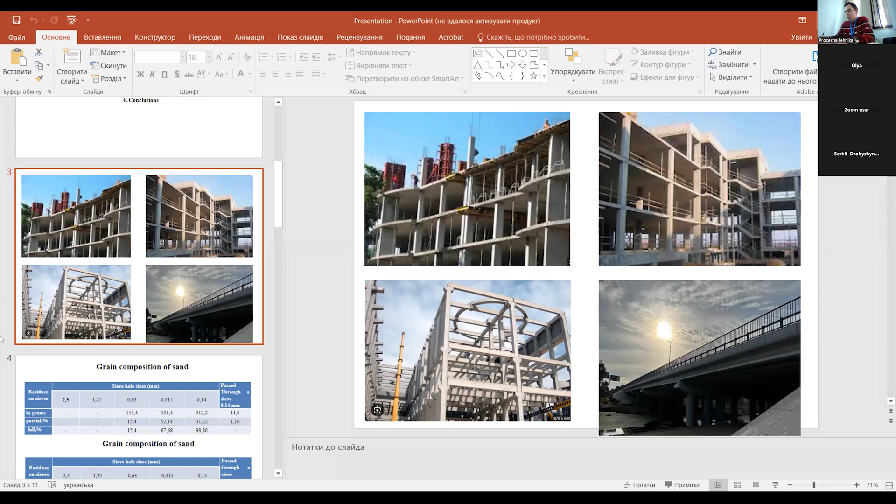Low cycle fatigue. Various studies have shown that changes in the structure of concrete due to the size of the aggregates lead to shifts in the levels of load corresponding to the lower and upper limits of microcrack formation. These studies found that coarse fractions as structural elements of concrete act as stress concentrators, causing stress fields at the matrix-aggregate interface where microcracks primarily form.

Experimental research methodology. To study the low cycle fatigue of concrete more thoroughly, samples made of heavy concrete using traditional aggregates, two types of coarse-grained concretes, and samples made of fine-grained concrete with sand as the only aggregate, were fabricated and tested in the research laboratory. The concrete samples were made with slag Portland cement.

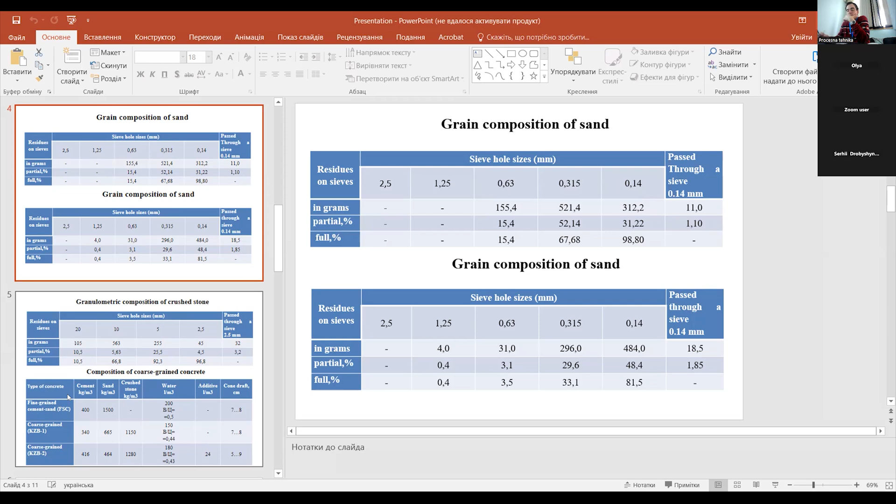For sand concrete, the aggregate used was quartz sand with a fineness modulus of 1.8 to 2.2. The sand was thoroughly washed from clay, sieved into fractions and dried. The grain composition of the sand for the fine-grained and coarse-grained concrete samples of the first type is presented in the table. For coarse-grained concrete samples of the second type, the fine aggregate was also quartz sand with characteristics determined in accordance with local standards. The fineness modulus of the sand was 1.18 and its grain composition is shown in table 2.

Concrete mixtures were prepared under laboratory conditions. The dimensions of the prism samples were 4 by 4 by 16 centimeters for fine-grained concrete, 10 by 10 by 40 centimeters for coarse-grained concrete of the first type, 15 by 15 by 60 centimeters for coarse-grained concrete of the second type. The samples were cast in horizontal molds and compacted on a vibration table. Samples were demolded at the age of 28 days.

Prisms measuring 4 by 4 by 16 centimeters were tested under low-cycle compressive loads using a specially fabricated spring device. Prisms measuring 10 by 40 centimeters and 15 by 60 centimeters were tested under cyclic loading on a hydraulic press. Before testing, the prisms were centered under a preload of 0.15 to 0.20 Rb. Samples were loaded to a specific upper level at a constant stress rate, with increment steps of 10% of the expected failure load.

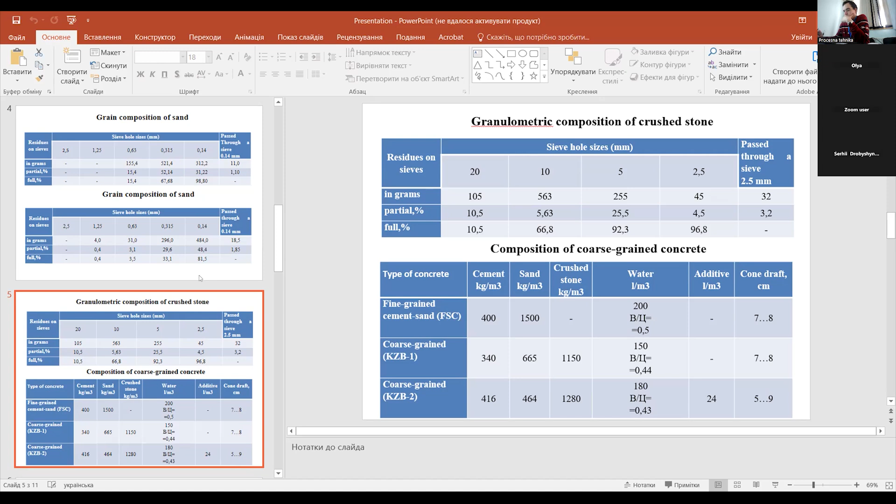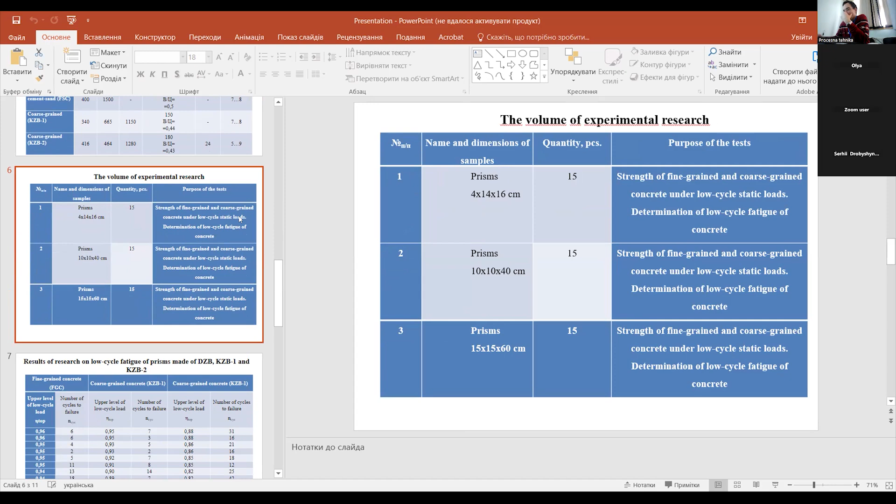Results of experimental research. The test results of the prisms subjected to low-cycle loads are presented in the table. For describing the low-cycle fatigue of the tested concrete prisms, a fractional linear function in the form of the dependency eta cycle versus N cycle was adopted, formulas. From the derived dependencies, it is evident that at their limiting values, they acquire physical meaning.

The values eta cycle 0.906, 0.841, and 0.747 correspond to the low-cycle fatigue limits for their respective types of concrete. The low-cycle fatigue of concrete obtained from the dependency represents a hyperbolic curve in the coordinate axes: stress level eta cycle, and number of loading cycles N cycle sustained by the sample until failure.

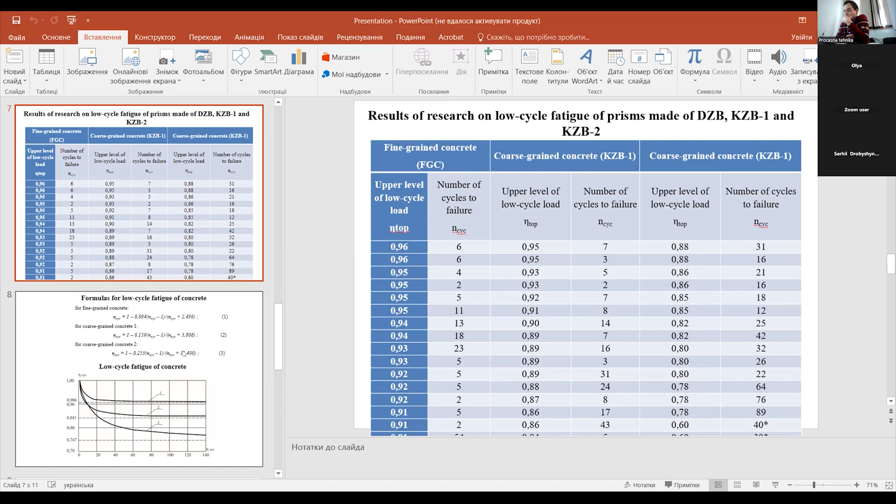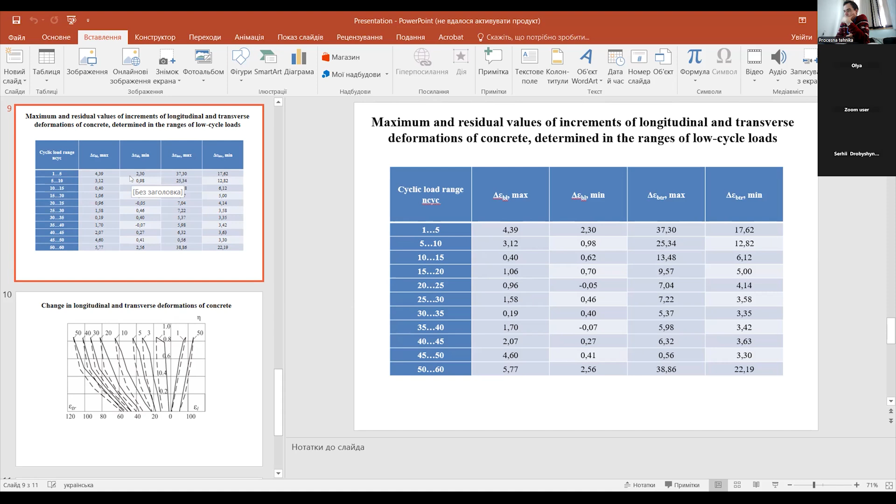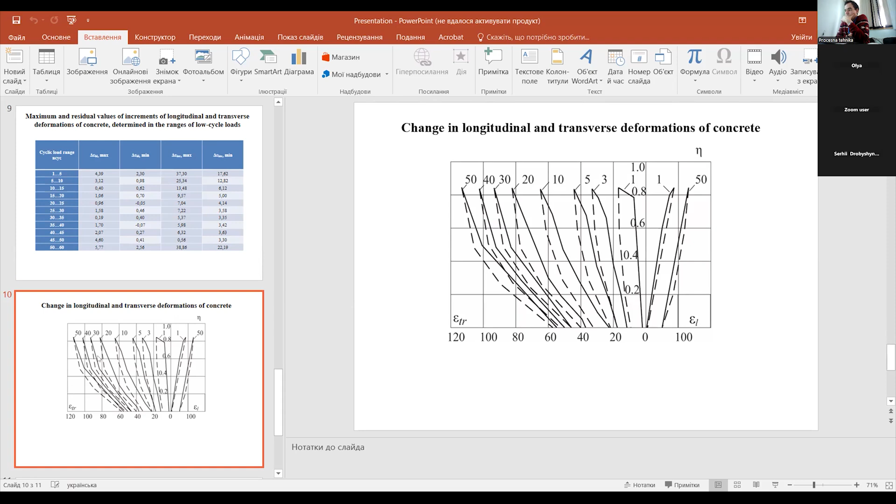Maximum and residual values of longitudinal and transverse deformation increments of concrete were determined for the range of low cyclic loads. Changes in longitudinal and transverse deformation of concrete are presented.

Conclusions. The first one. The methodology for experimental studies of prism samples made of fine-grained and coarse-grained concrete under low-cycle loading has been presented. The second, functions in the form of the dependency cyclic load level versus number of loading-unloading cycles until sample failure were obtained.

The third, the low cycle fatigue limits of the tested concretes were established as eta cycle 0.906, 0.841, and 0.747 for fine-grained concrete, coarse-grained concrete of the first type, and coarse-grained concrete of the second type, respectively. The fourth, hyperbolic curves in the coordinate axes stress level versus number of loading cycles sustained by the sample until failure were constructed.